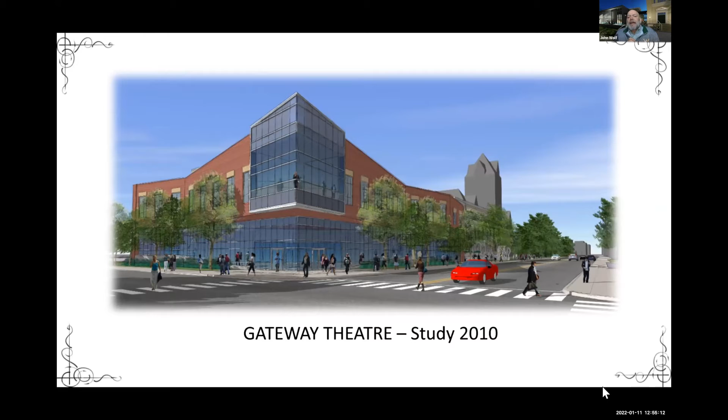At this point in time, the university had launched the Pivotal Moments Capital Campaign. The Hilberry Gateway Project became one of the leading priorities within the capital campaign, and we were given permission to move forward.

So we did, and we assembled a team. The team included, of course, facilities planning and management at the university, who has been outstanding. HGA is a design and architecture firm out of Minneapolis—an international firm that specializes in performing arts centers and hospitals. Hamilton Anderson was the local architect, who also serves as the construction manager, continuing to take it through the process of getting it built.

Auerbach, Pollock, and Friedlander were the theatrical consultants, and Jaffe Holden the acoustic, audio, and video consultants. They became an important part of this process because Gretchen Valade came forth with a very large gift to turn the Hilberry into the Gretchen Valade Jazz Center, and of course the acoustics became a vital component of that. We were thrilled to have Jaffe Holden on board.

And then, of course, the College of Fine Performing Communication Arts—the departments of both the Maggie Allesey Department of Theater and Dance, and the Department of Music—all became part of this team to begin this process.

So when you undertake this process, the very first thing you do is called programming. In programming, you look at existing facilities, you meet with faculty and staff, students, administrators, FP&M, community members, alumni, and neighbors, and you talk about what it is you're looking for. But you also take time at this point to determine the actual spatial needs—what would a scene shop look like, what does a costume shop look like?

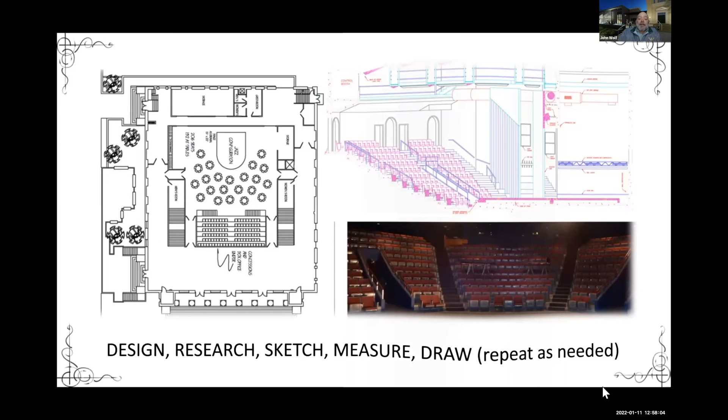So after programming, we began, and we met monthly for a long time with design, research, sketching, measuring, drawing, repeating as necessary. And at one point in time, we finally landed on the very first design of the Hilberry Gateway.

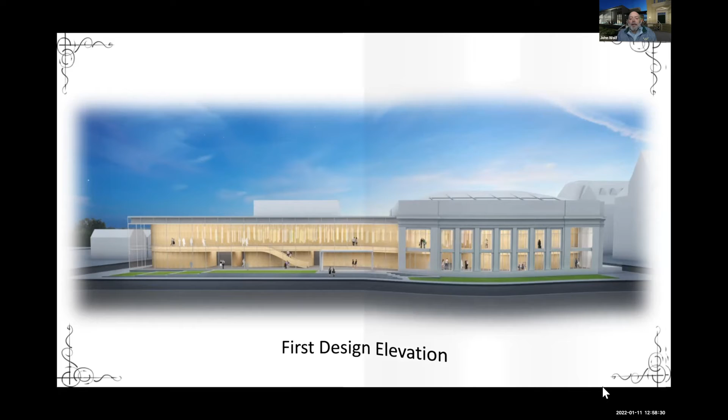An expansive building with a lobby that stretched from Forest to Hancock. You're looking from Cass Avenue, looking west. Imagine sitting in Shangri-La and looking out the window. That's where we're at, with a two-tiered lobby with balconies—truly an expansive, beautiful space that met all of our needs in a really very handsome way, I think.

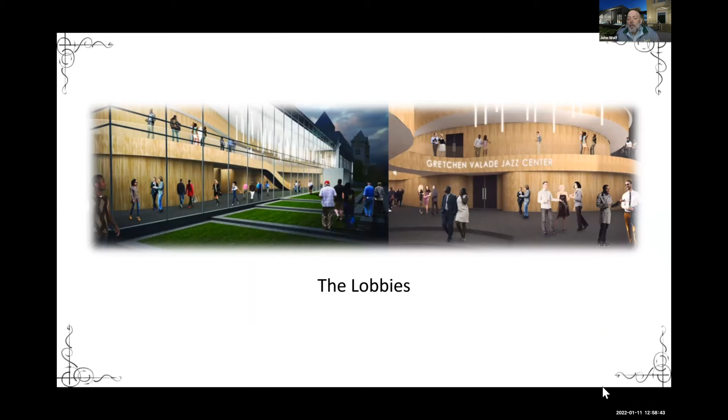And then we found reality. And we weren't just over budget, we were way over budget.

And what we didn't know at the time, because this had been priced by the designers—it's a huge firm that has pricing—but what they were unaware of in Minneapolis was that at the time there was $3 billion worth of construction planned in Detroit. That included the Hudson Tower, which was already in the planning, as well as many other renovation projects throughout downtown and Midtown.

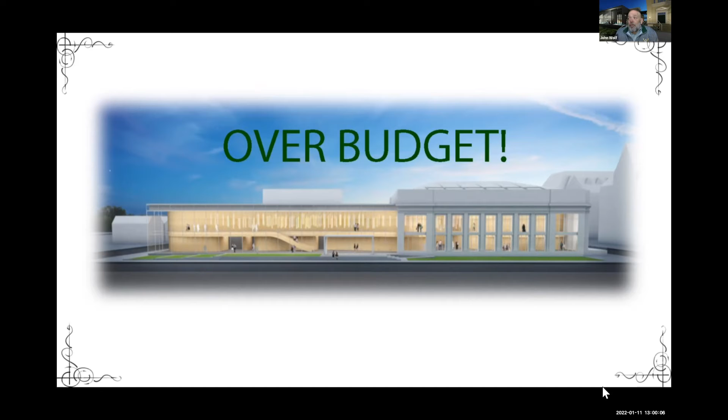And the other piece we didn't know is that sometime around 2008, the majority of the trade contractors—the electricians, the plumbers, the heating and air conditioning people, masons and carpenters who can handle projects this size—had left Detroit. At that point, with the downturn in the economy, they saw no future in Detroit for ongoing construction projects. So the ones that remained could ask for any amount they wanted, and they did.

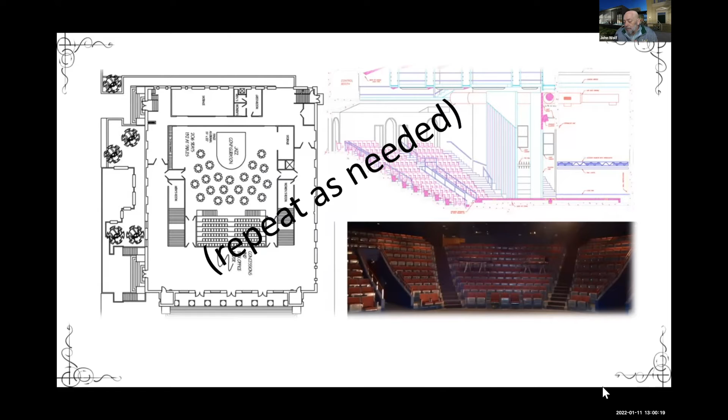And so we repeated as needed and went back to the drawing board and began to really work this.

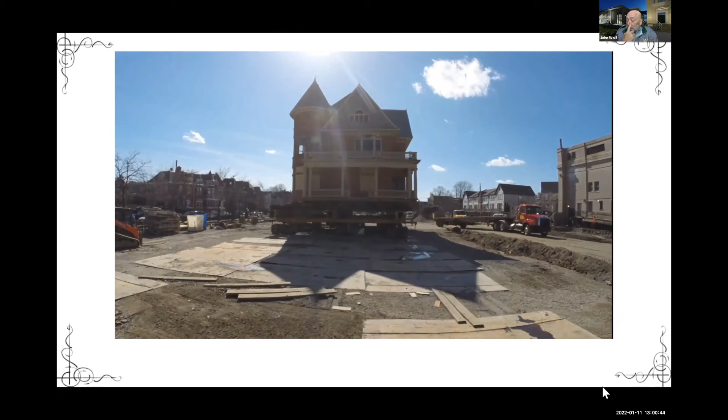In the meantime, we had permission, and we knew that the McKenzie house was going to have to move. So we started moving the McKenzie house. And in the meantime, we continued to work to get the price down where we could afford the building.

Well, the low-hanging fruit was the balconies. So we cut the balconies. After we cut the balconies, that means we didn't need the upper lobby—a lot of structural steel involved, great. Moving in the right direction.

But you'll notice that the Gretchen Valade Jazz Center stage actually was on Hancock Street. And so it was flipped back around to be very much in the same space that the Hilberry stage is currently, which allowed us to use some infrastructure.

We also cut the lobby in half and put the main lobby in the Hilberry Gateway Center, and made use of the existing lobby in the Hilberry, just using two box offices rather than one large connecting lobby. And we continued to work.

Initially, the price was coming down, but eventually we found out that our partners just couldn't get the price where we needed. And no matter what we did, it seemed that the subcontractors weren't lowering their prices, nor the contractor.

At that point, the university severed ties with the original contractor. And when that happened, we had to hire a new contractor. And that was over the summer.

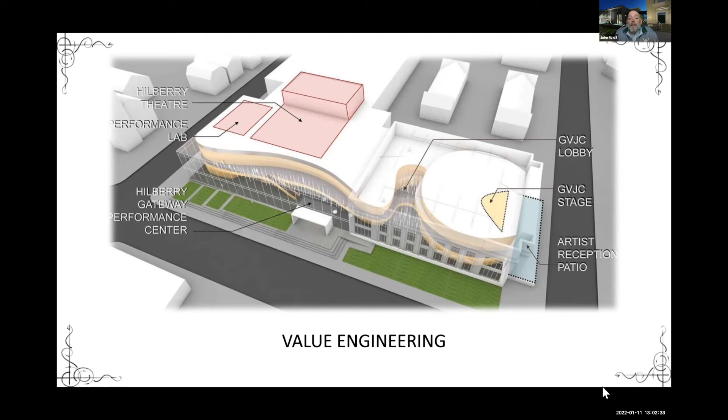And if you know about construction in Detroit, summer is prime time to get some building done. So we lost the summer, but we eventually got the price down and brought on a new contractor, Rockford, as the new construction manager. And we started working towards the development of the building that you see in front of you.

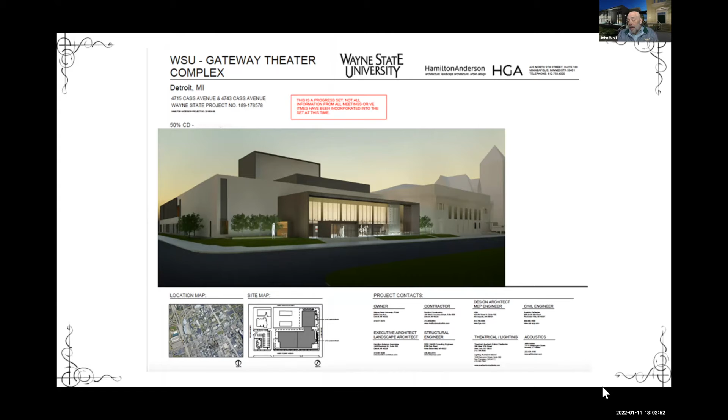And we were ready to go. And yes, we stopped again. And we stopped again for another summer.

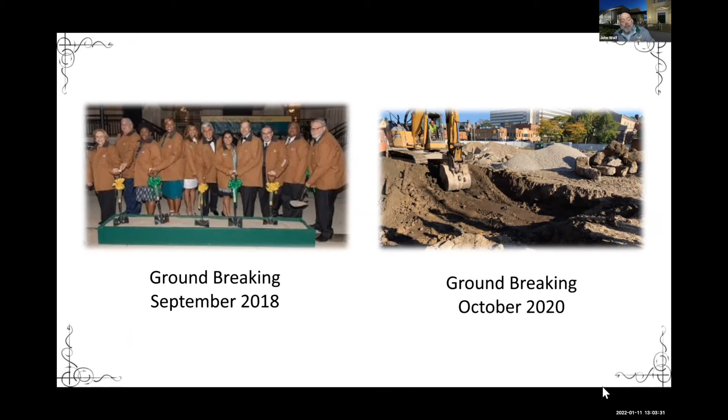As we all recall, this is a March beginning. We went through the summer, the second summer in a row, without being able to move forward. But finally we were able to move forward, and we started breaking ground in October of 2020. For the record, that was 25 months after the ceremonial groundbreaking when this project was launched.

Until the work had to stop again. This time, it seems that under the streets of Detroit there aren't very good records of where everything from electrical to sewer lines to water lines are located. The sewer line that feeds the apartments heading up this block, the condos, was going to turn and run out to Hancock Street, except there was a large underground vault in the way.

So we had to reroute. You'd think, well fine, let's take the sewer line out to Forest Street. Great idea, except the sewer line on Forest was at a much higher elevation than the one we were dealing with, and I think we can all agree we'd prefer the wastewater and sewage to run downhill.

So the only option left was to separate the two buildings, the Hilberry, the current Hilberry, the Gretchen Valade Jazz Center, and the Hilberry Gateway, and dig a very deep hole behind the Hilberry Theater that was actually deeper than the basement of the current Hilberry. So now we had to redesign an entire support system to make sure the Hilberry doesn't fall while we dig the hole, to reinforce the foundation so we can run the sewer through.

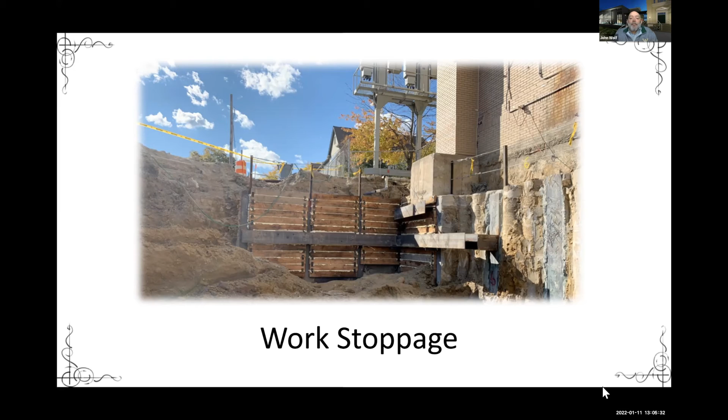And we're paused again. But eventually, with this great team that we have, we managed to get through that, and we kept digging and began construction. And here's where we are today.

If you've walked by, this picture was taken December 30th. The building has been stood up. The entire footprint of the building is in place. You can walk inside and see walls.

And we continue to move forward on this building. Here's an updated picture of it from standing on Forest, looking at the side of the building, and you can see the windows. If you look at the upper left-hand part of the picture, that's going to be a giant louver, because all of the heating and air conditioning and boilers and water heaters are all up in that space.

And we move forward. But this is a story about overcoming adversity and working together. And it's a long story because it's been a long time. And it's not just that we had a contractor that we had to replace, and it's not just that we had COVID, and it's not just that the sewer line was in the wrong place, but it's also a story about the people who have persevered and changed over during this process.

There have been two associate vice presidents for facilities planning and management during the course of this project. There have been three full-time different university project managers on this project, with interim project managers in between, so I think we have a total of five trying to guide this project. It's a nice time to give a shout out to my friend Cadest, who is now the project manager and absolutely phenomenal at that job.

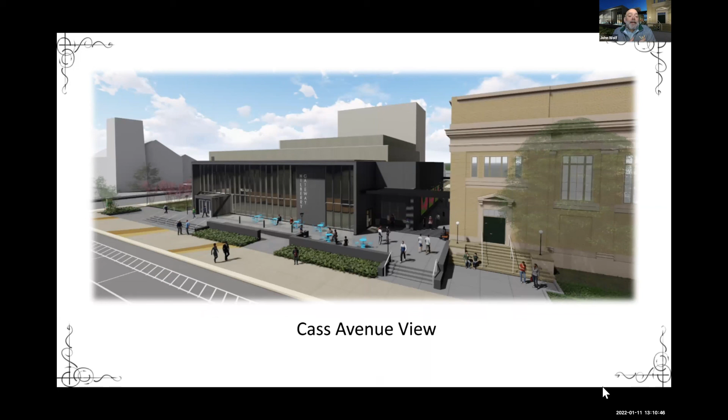So here's the building, and obviously renderings of the building. It will have a lovely frontage onto Cass. This is my favorite rendering because I think if you look down the alley where the students are walking between the two buildings, when the sewer line happened and we had to separate the building, I actually think it was one of the greatest mistakes or issues to happen to the building.

Because this alleyway, which will look very much like the Belt in downtown Detroit, if you know that, provides a place to hang art. There are outlets for students to plug in amplifiers. It moved the cafe in the building. If you can see the windows right there, to the dark windows, that's a cafe that will have windows to the inside and the outside. People can, when occupied, come and get their morning coffee in the neighborhood, grab lunch, hang out in this space.

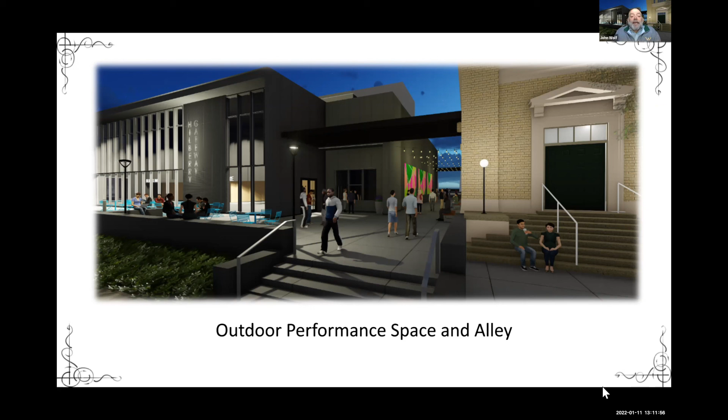The large patio is becoming an outdoor performing arts space. We have installed infrastructure that will allow us to put some lighting, some theatrical lighting out to highlight the space. I think it's going to be a phenomenal place.

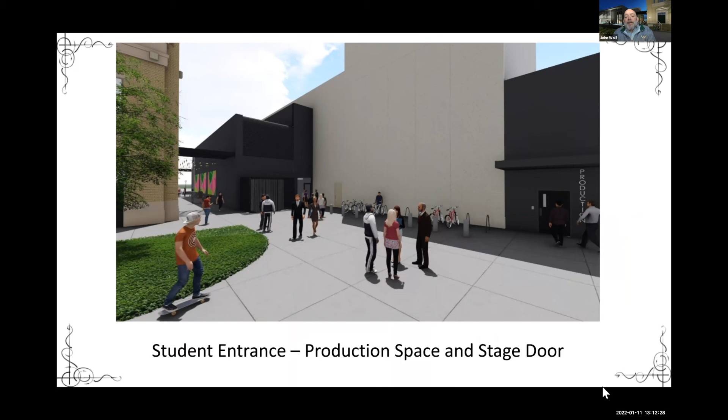The students will enter backstage by walking through that park that's on the west side of the Hilberry that no one ever seems to use, but it will become activated, and the production space is then back there. And so as students migrate from class in Old Main to production, the park now becomes an important piece, and I think it'll be a beautiful flow.

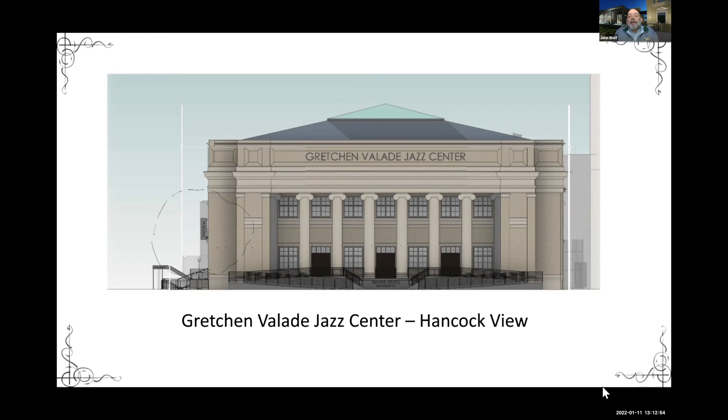The Gretchen Valade Jazz Center will look very much like the Hilberry, but it will be cleaned up. The name will be across the frieze. You can see there's a jazz sign, a neon sign on the side of the building, but it will remain inviting into a beautiful space.

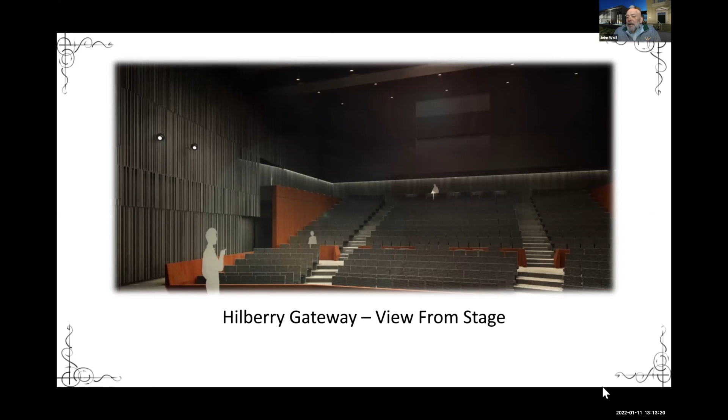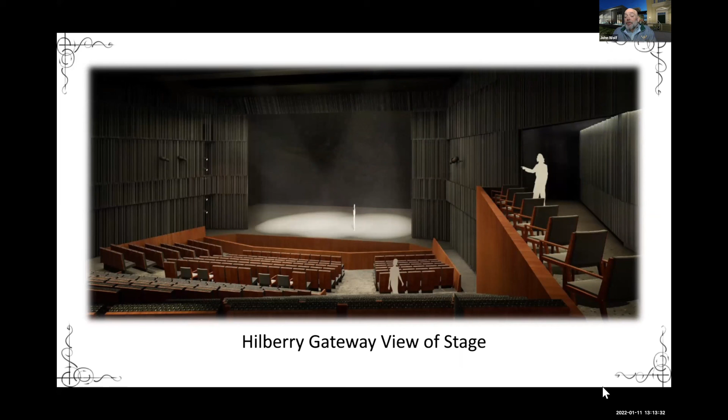And if you're in the theater looking down on the stage, it remains an intimate space. The depth of the theater is no different than the depth of the current Hilberry, so with a much better viewing angle.

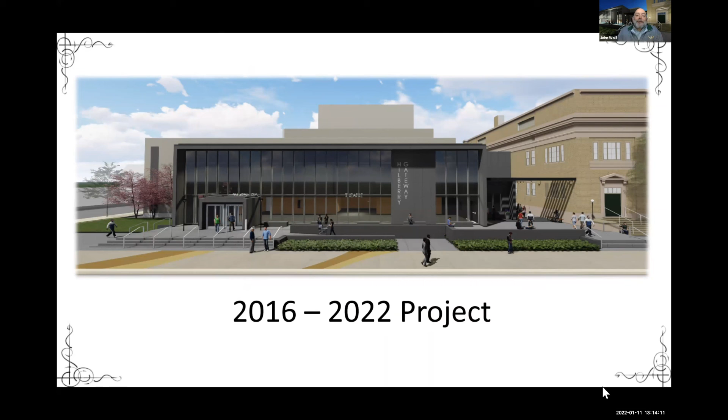So it's a project that's been going on for six years now, and this will be the year when the university will take occupancy of the Hilberry Gateway. So I'm looking forward as we go through this year to finishing this up. And thank you.